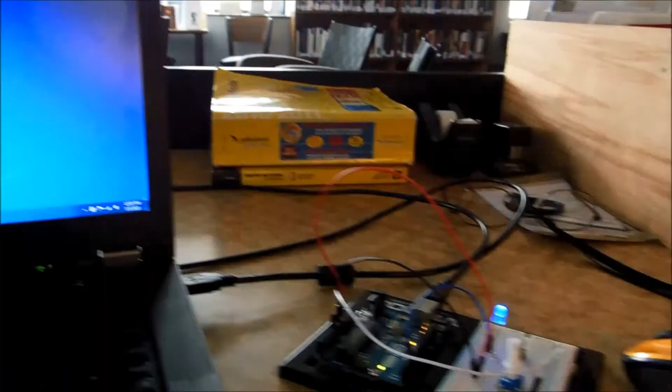Anyway, we've got a simple program here, which we've seen variants of with the Arduino itself in writing code. So this is where we just take our analog voltage and we fade it. Now, what we have over here is we've got our pot set up and an LED. So we're going to take the pot and adjust it with the LED.

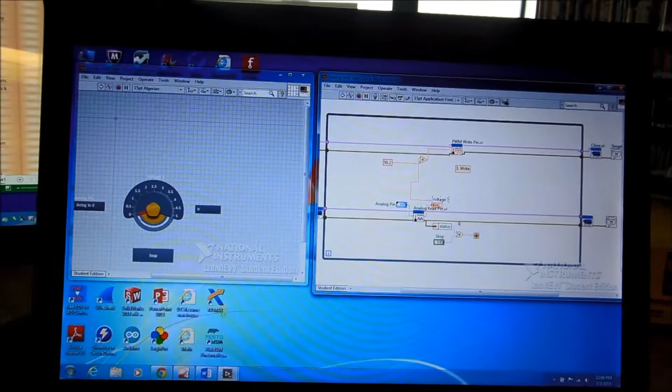Now, if we look back here, there's two parts to LabVIEW. This is like our control section where we control the program. And then also we can open up a window that's called the block diagram. Now this is what actually takes place. So we're reading an analog voltage and we're writing to our pulse width modulator pin. So this is kind of the controls, and this is the stuff that does the dirty work.

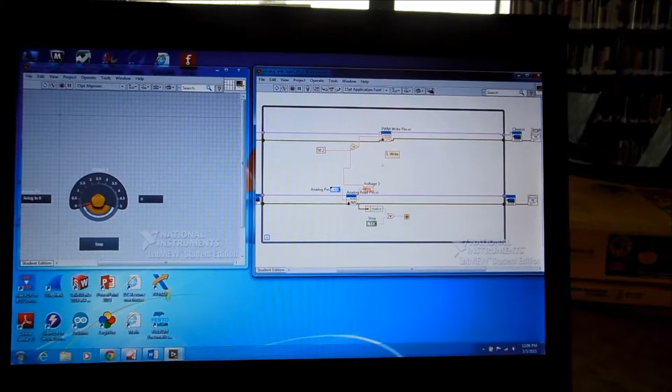Now the way that LabVIEW works, which is so much different than our Arduino, is all you have to do is place these components in there, tell them what analog pin we're reading, tell them what pulse width modulator pin we're writing to, and the code automatically gets written after you connect everything up. And it's a lot more difficult than that, but easy to use is easy to say.

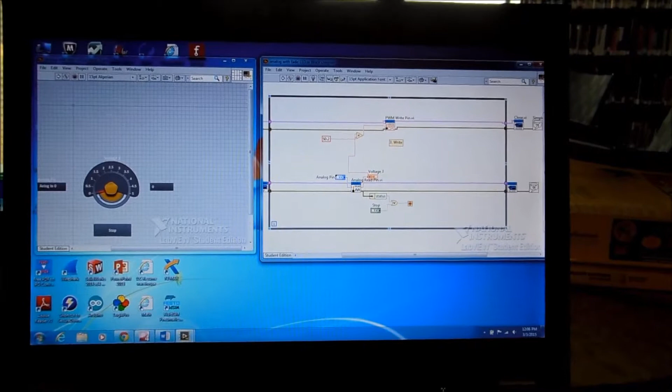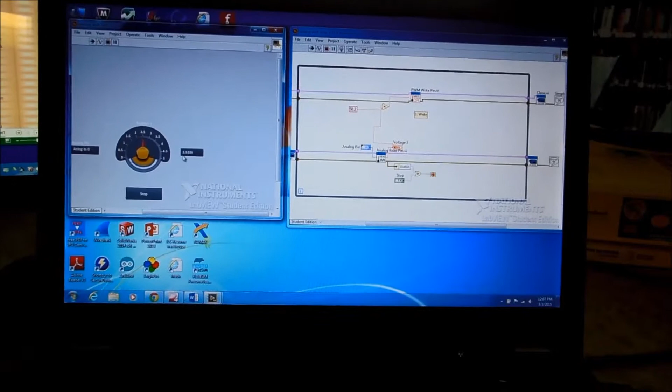Anyway, we go over here and we can run our program. So that just loads the code, and it does it just like you'd see normally in Arduino. And now if you look at the gauge, we can adjust our pot, and this tells us on the gauge where it's at, right over this doohickey. And then here's the actual readout. Now we've got too many decimal points in there, so it's kind of dorky, but you can see we're reading from analog pin 0.

And now if we go over here and we look at our circuit, and we'll adjust it here, and here we're getting dimmer, dimmer, dimmer, and we're just about out, and now I'm reading like 1/10 of a volt. So now if we increase it, now we're reading about a volt. There, it's about 2 volts and 3 volts, and anything beyond that it's really hard to tell, but I can perceive a little bit brighter. But beyond about 3 volts, it's really hard to tell that it's dimming or not, and it's probably really hard on the video.

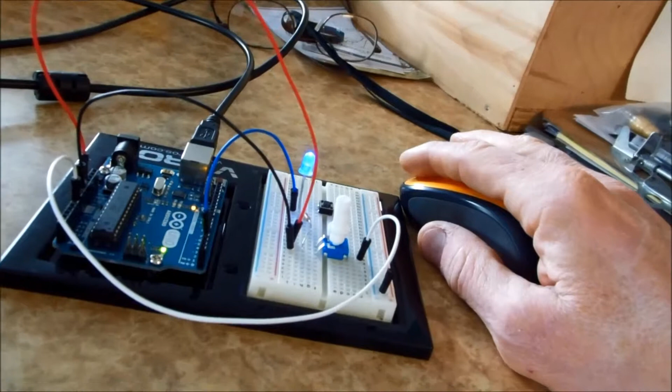So anyway, that's what we do, and we have our stop function, so we can stop the code. And then, here's stop also, and then here's start. And if we do this, and take a look at our little Arduino, when we hit the run button, what it does is it loads the code. So you can see the little flipping of the LEDs and whatnot to say that the code is running. And now we can see that, yeah, our code is functional.

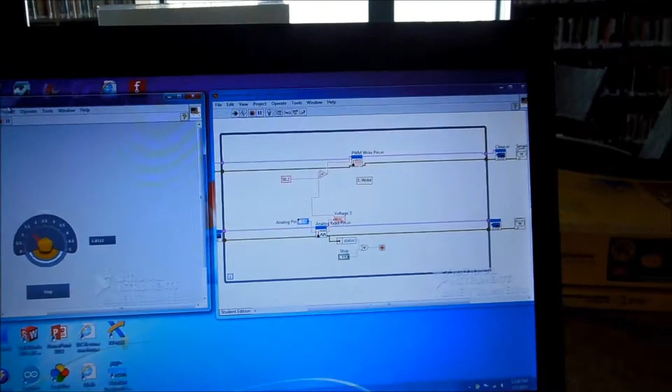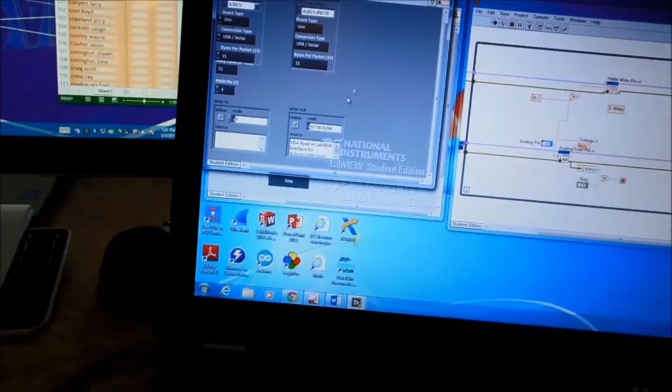So it is just like doing it with the Arduino, except you don't really have to write the code. All you have to do is slap down the block diagrams. And on these, for instance, this is our port write. So it says PWM write pin. But if we want to know a little bit more about it, it'll tell us over here. It says we're on pin number 3. And we can choose any PWM pin we want. All you have to do is add a few constants, and the rest of the code is taken care of by LabVIEW.

And it's pretty neat. You can change these gauges to whatever you want. They don't have to be like the speedometer. They can be kind of like a slide function, and we'll take a further look at that in the future.